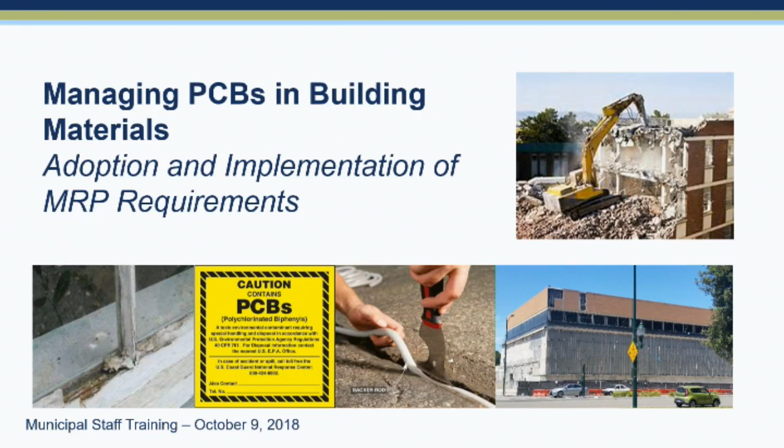All right, so well, let's see, I guess I'll go to the next slide. We've looked at that enough.

So we have a few goals for today. I don't usually do it this way - I printed out the notes for Peter, and I don't usually. Some of you know me, I'm a college lecturer, and I walk all around the classroom usually and talk in your face and things like that.

But today I actually printed out the notes portion as well, and that's because part of the goal of developing this set of slides is also for you to be comfortable with this information if you need to bring it to city council, if you need to talk to building officials, planning officials, contractors, what have you. We also put some notes so that it's useful for many people.

So as we go along, I want to double check our notes as I'm talking to make sure we have the material there. If you have questions as we go through the material, because there's something you're not clear on, or maybe you're clear on for yourself but wouldn't be clear explaining it to another individual and want more clarification, ask those kinds of questions as we move along. I think we have a good amount of time for Q&A as we move through our morning.

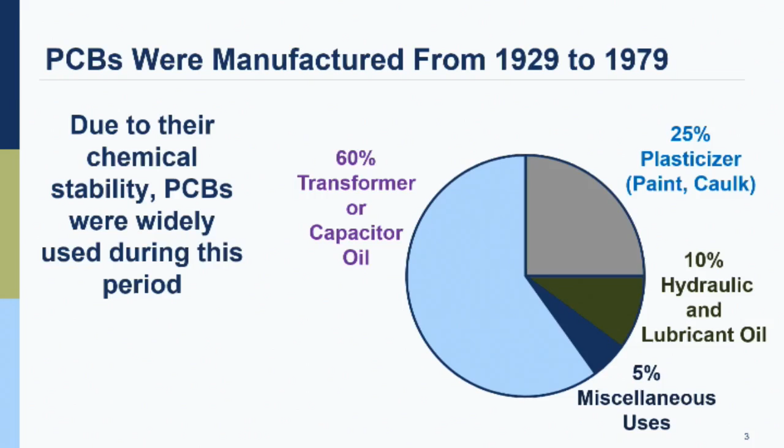PCBs are highly stable and have some unique properties, some unique electrical properties and other things, and so they were used for a number of different processes. This is where you mostly saw them over the years, and they were discontinued from manufacturing in 1979. The use could have continued into 1980 as stock was moved off of the shelf, so you see them in paints and caulking and things like that, which is much of what we'll be talking about here.

The issue here is that San Francisco Bay has been deemed impaired due to PCBs, deemed unfishable through the Clean Water Act. PCBs bind to soil and sediment, and at the lower levels of the food chain they pick up the PCBs in that sediment. It moves up the food chain and bioaccumulates, getting higher concentration through the food chain. We do have people subsistence fishing in San Francisco Bay, and we need to return to a situation where we feel the fish are safe for them to eat.

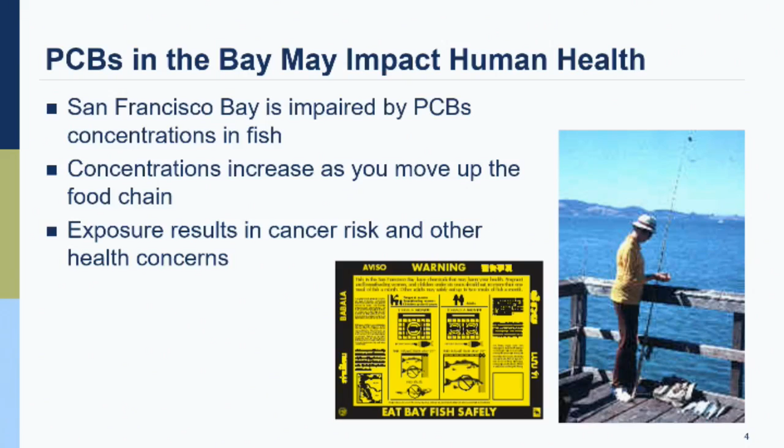The first health advisory came up in 1994, where it was determined that PCBs in some species of fish in San Francisco Bay were at high enough concentrations that they were not safe to eat. Under the Clean Water Act, if a water body is not fishable or swimmable, it's considered impaired, and in this case it's not fishable.

When a water body is impaired, the Clean Water Act requires that the Regional Water Board prepare a TMDL, total maximum daily load, which we put on this slide as a pollution diet for the lay people to understand what this wonky word TMDL means. The TMDL requires developing plans to reduce the loadings of that pollutant and eventually achieve water quality objectives.

The TMDL itself was completed in 2008. That means it was completed by the Water Board in 2008, and that's when implementation of the different aspects was able to begin, basically.

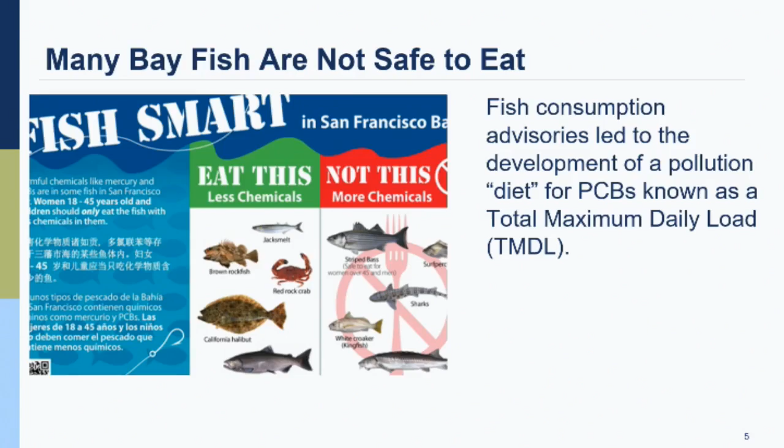This is when they identified, in their TMDL, all the potential different sources. Looking at this in the mid-2000s, these are all legacy sources at this point, because we're not utilizing PCBs anymore since 1980. So they looked at all these various legacy sources, and you can see there's quite a diversity.

San Francisco Bay is certainly unique compared to other water bodies in the United States that may be impaired with PCBs. We're a different kind of watershed in that it's a bay and an estuary rather than a river, with PCBs moving out less readily. We also have dredging for the shipping channels, so it's a very unique situation here.

So they looked at all these different sources, including what's coming in from the Central Valley, from those watersheds, atmospheric, any hot spots, municipal or industrial, military hot spots, and the dredging as well. But even with all those other outside sources, it was identified that stormwater was the single largest source. So the TMDL is asking for stormwater to pull down the loading to San Francisco Bay, reducing that diet, if you will, by 90%.

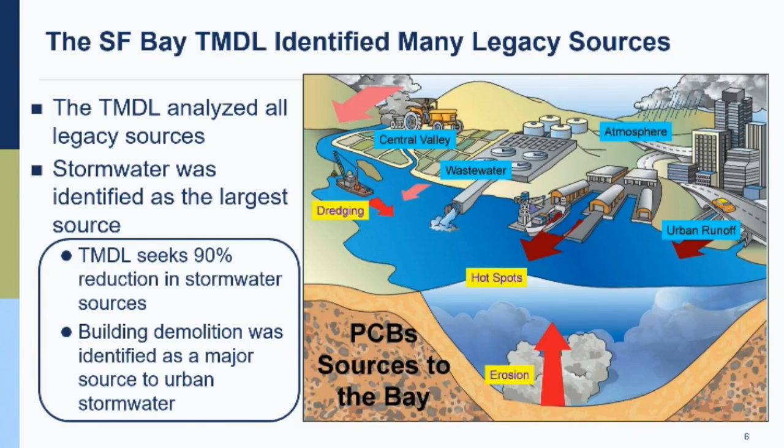Nonetheless, it's not that stormwater is being picked on, or that building demolition is being picked on. The TMDL looked at all these different legacy sources and sought to find reductions and opportunities for all of the different sources. So while we are going to talk about this one for the rest of today...

This very last bullet item is about managing PCBs in building materials. Realize that, and this might be helpful when you're talking with building owners, consultants, contractors, for them to understand that the regional board didn't just seek out buildings and the PCBs in buildings, that it's part of this larger body of effort going on throughout the Bay Area. We've got the hot spots, the dredgers doing their part, monitoring sediments, wastewater treatment operators and municipalities looking for hot spots and working on green infrastructure that would collect stormwater rather than let it release pollutants right out into the water bodies. So it's part of a bigger picture, and hopefully that will assist in getting that information out to the building contractors.

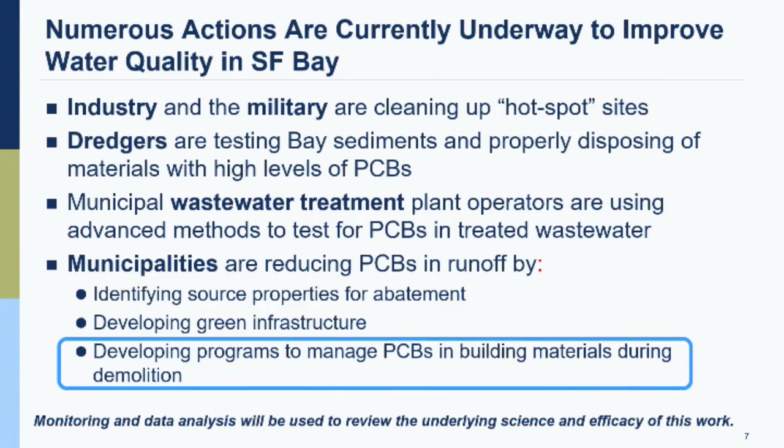That does lead us to why we are here today: the provision in the MRP, your municipal regional permit. There's 76 cities and counties and other entities that need to be implementing this. So the effort we're sharing with you today is how to standardize this for all of you, so there weren't 76 different ways to implement this throughout the Bay Area.

This is part of provision C12, how to deal with building materials prior to demolition rather than during demolition. The requirement in your shared permit is to come up with a method for identifying the right kinds of buildings and building materials, and then provide the necessary authority for that. We'll walk you through that.

It's only applicable to buildings from January 1st, 1950 to the end of 1980. That gives a little wiggle room, even though it was discontinued in manufacturing in 1979, they were still moving it off the shelves, so that gives us a little bit of space. Wood frame buildings and single-family residences are not part of this, and it's also applicable only to complete demolition, and we'll get back to that in a few moments.

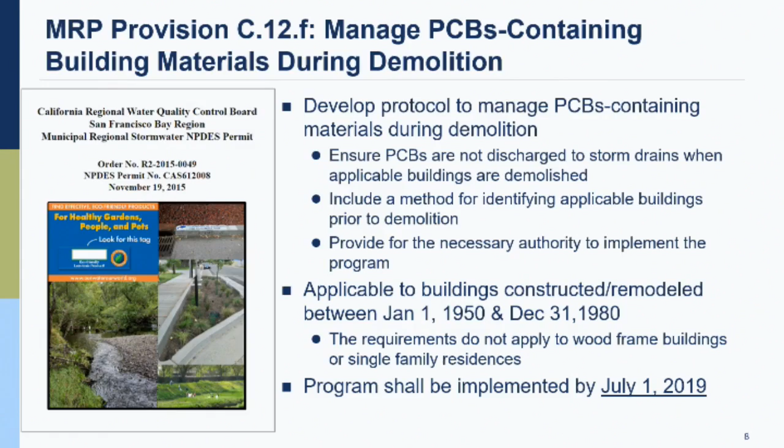The entire point of what we're trying to accomplish is when a building is going to be demolished, there is some time to evaluate the building, bring professionals in who understand what they're looking for, what kind of materials these PCBs might be in. We've identified the high priority materials, we'll talk about that in a minute. Then monitoring for that, making sure those high priority materials are managed appropriately prior to demolition, so that when the wrecking ball arrives, the particles most likely to have the highest concentrations of PCBs aren't escaping out to nearby storm drains, and the dust isn't spreading around. The dust that will be spreading around doesn't include the high concentration of PCBs, since we're removing them in advance.

This is very analogous to what is already done with asbestos, a similar kind of concept. Carmen, did you want to weigh in at all? I'll hand you a microphone—you have to have a microphone.

Hi, I'm Carmen Santos with the Environmental Protection Agency, and we deal with a lot of these issues about building demolition. One of the things that happens when somebody wants to demolish a building is to look into what materials have PCBs. They will know the age of the building, so they will check and evaluate that, take samples, analyze. For us at EPA, we prefer that anything that has PCBs be addressed, not only those 4 priorities identified through this BASMAA process, although those are very important and we find them most of the time in these buildings that are demolished. But the point I want to make is that you would still have PCBs in these buildings even after you take out these priority PCB-containing materials.

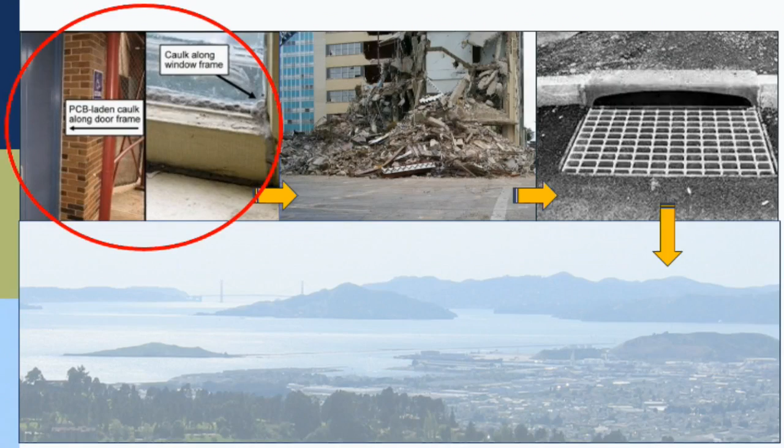So the MRP requires the following components: established municipal authority through an ordinance or resolution, a CEQA notice of exemption, an application packet for permittees wanting to complete a demolition, a methodology for how they survey the building, potential cost recovery, training processes, and submittal of information to BASMAA or your countywide program.

What we hope to show you today, if you haven't already seen it in previous meetings with some of you, is that BASMAA has developed some model documents. They've taken care of the CEQA analysis for you, prepared application packages and all these different pieces, so it should be fairly straightforward for each of the municipalities and agencies involved.

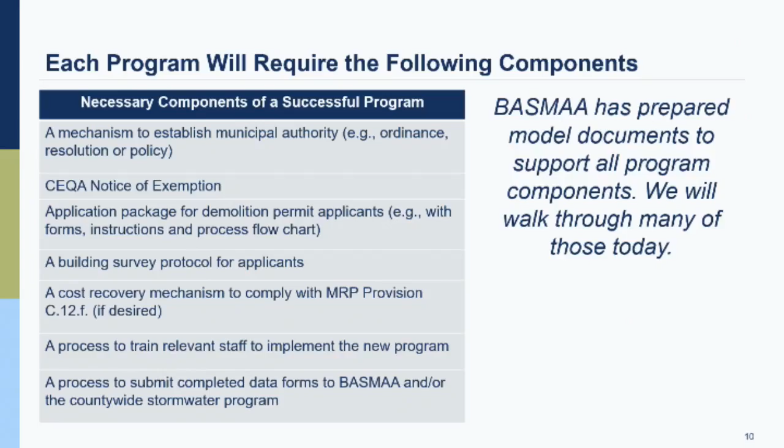As Carmen mentioned, the team came up with 4 high priority PCB-containing building materials, so we'll talk about that. We developed a protocol for you, for the contractors, and for the regulatory process. It's worth noting that we worked with a technical advisory group, and you can see the representatives that were there.

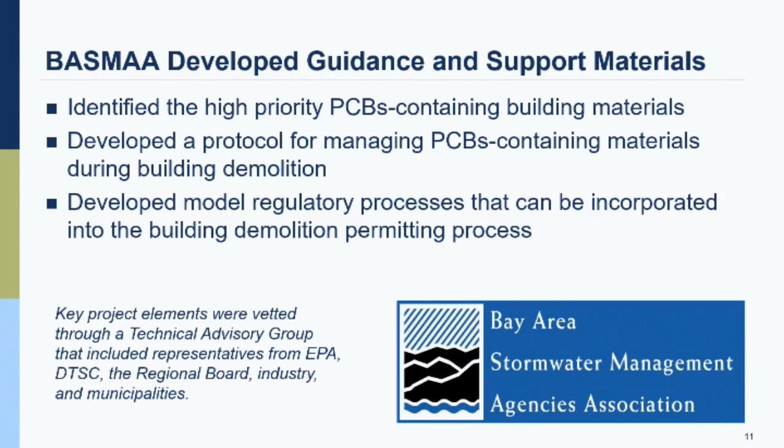So it has been vetted by regulators, industry stakeholders, and municipalities.

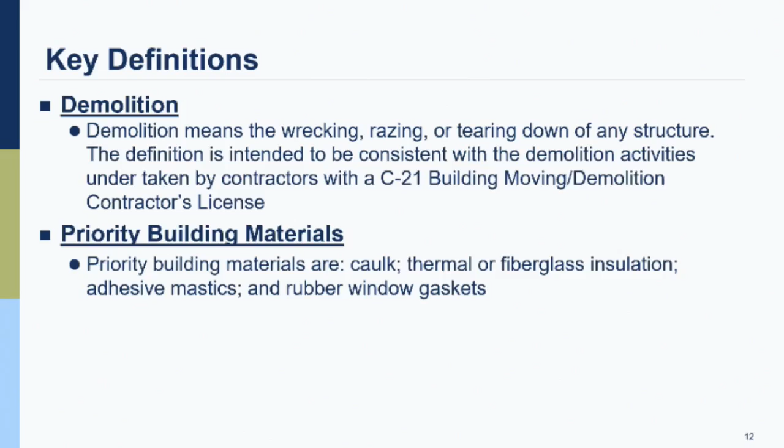So there's 3 key definitions, I'll put them all up there. We had a little haggling back and forth early in this process about what demolition means, and contractors explained to us that there's already a definition in their field. It's basically the complete demolition of a building, not a partial demolition of a structure.

I'll show you the 4 building materials in more detail in a moment, but we'll hear them over and over again. So really what we're talking about isn't all possible pieces of concrete, as Carmen alluded to, but caulking, insulation, gaskets, and other adhesives.

As I said before, it's any structure built or remodeled between 1950... so built or remodeled. If it was built in the 30s but had a significant remodel perhaps in the 70s, then you're going to need to take a look at it, or the contractor will, with those exemptions we mentioned before.

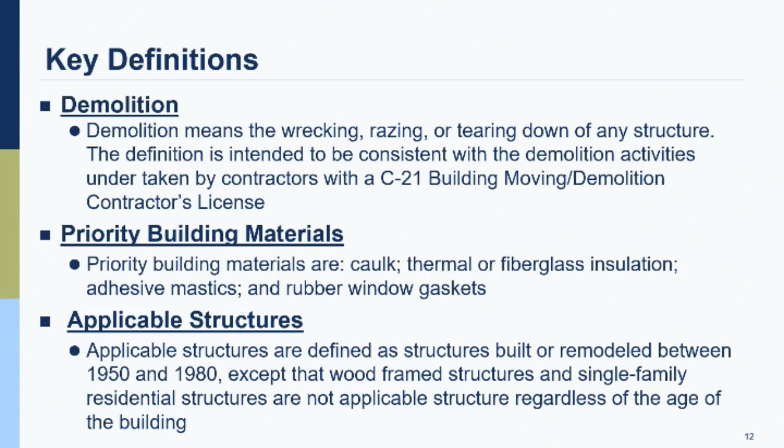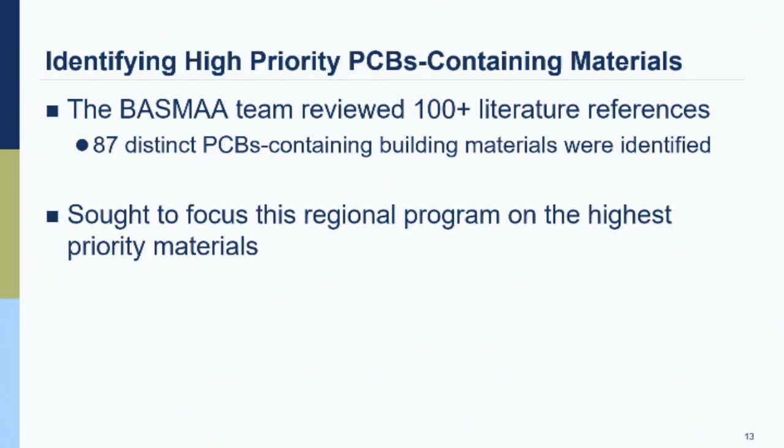Just briefly on background, how did we get to the 4 high priority materials you're going to be seeing? It was based on a very significant literature review, where they looked at PCB concentrations in a number of building materials, and focused on materials most likely to get into stormwater during a demolition sequence. There were some weighting factors and a whole analysis. If there's questions on that, we're happy to answer those during Q&A.

So it came down to caulks and sealants around windows or window frames, around door frames, expansion joints between concrete sections, say floor segments with an expansion joint in between them, and thermal fiberglass insulation around HVAC systems, heaters, boilers, heat transfer piping, inside walls or crawl spaces.

Adhesive and mastic, it could be below the carpet and floor tiles, or between the roofing materials and the flashing. And the rubber window seals or gaskets around any windows or window frames.

You'll notice a disclaimer here that this does not include things typically already managed with pre-demolition activities under current management strategies. So fluorescent light ballasts and polyurethane foam furniture and things like that would already have been removed per current regulations prior to demolition.

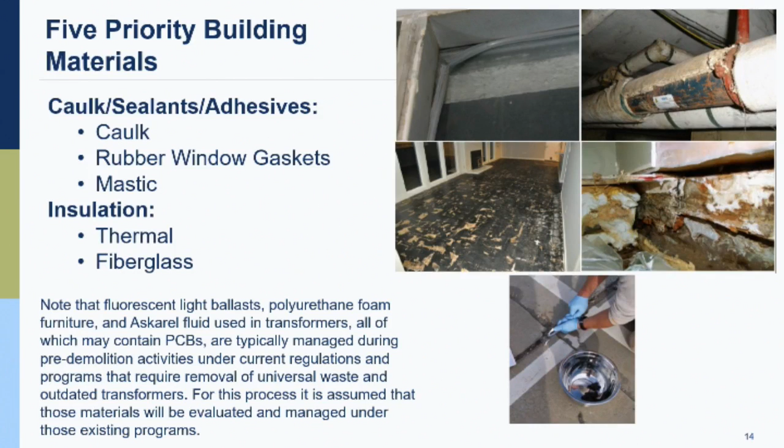All right, Peter, I think it's your turn.

Okay, thanks Stephanie. I'm going to handle the next section of the presentation on legal authority, and we'll get into the applicant package after the break. We thought it's important to start off this morning talking about what you all are going to need to do, because the deadline is approaching soon, and we want to make sure you're starting to think about, hopefully you've already started in your jurisdiction, talking with some of the other people that are going to be involved.

So there's this concept of establishing legal authority, and there are different options we've laid out in a memo, one of the BASMAA documents that's been mentioned. Before we go any further, I wanted to hear who's here in the room today, what different types of departments from municipal organizations. So how many people here are from a building department? Raise your hand. Okay, maybe about 10 or 15 people. What about a planning department?

Okay, just one person. All right, good. Maybe some more planners will be involved later. I'll talk about that. What about building inspectors specifically?

Building inspectors, okay, we got a couple of those. What about people in public works like engineers? Okay, we've got a few, 5 or 6 of those. What about stormwater program managers? Okay, we've got a good number of those, 10 or 15.

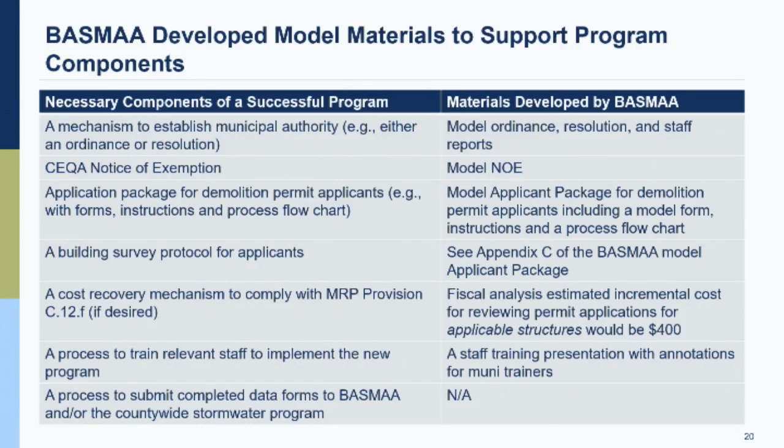Okay, so here's kind of an overview of the implementation process. You're going to establish your building authority, your legal authority, and your legal mechanisms, notify the applicants, maybe make changes to the documents that you already have or create some new documents, and make sure that you understand the process.

There's kind of these two thresholds, but it also gets a lot more complicated if EPA starts to get involved, and we're not going to try to turn all of you into EPA experts because it's a very complicated process, and your part of it is really maybe a very small portion, but it's a key portion, is to get these particular types of buildings that meet these different thresholds to start to test if needed. So that's really one of the main parts that the municipal staff need to do, is just to include that additional part of it.

And so there's these applicable structures and non-applicable structures. The applicant needs to do some screening. There's this level of 50 parts per million, but there are other thresholds as well. And so then the applicant will go through that process, and they'll submit a self-certified form to the municipality, either stating that no further requirements are needed, or that they will be doing testing and submitting the test results, and that they'll do the applicable remediation for that.

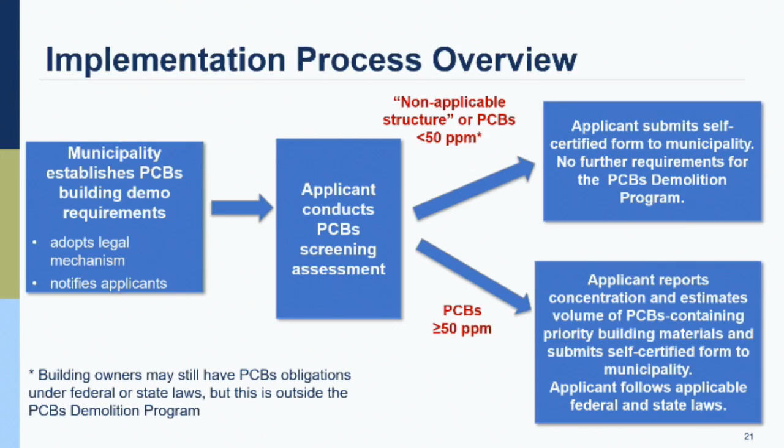So the applicant's role in the process is to do their due diligence, complete and submit the assessment forms, either being screened in or screened out, with the types of questions that we're going to be talking about, and then the testing if needed, and then demolition, and they'll be doing their remediation just as they would do for asbestos and lead, and if they have to do that remediation, they will do that. And the ones that are screened out will not have to do those additional steps.

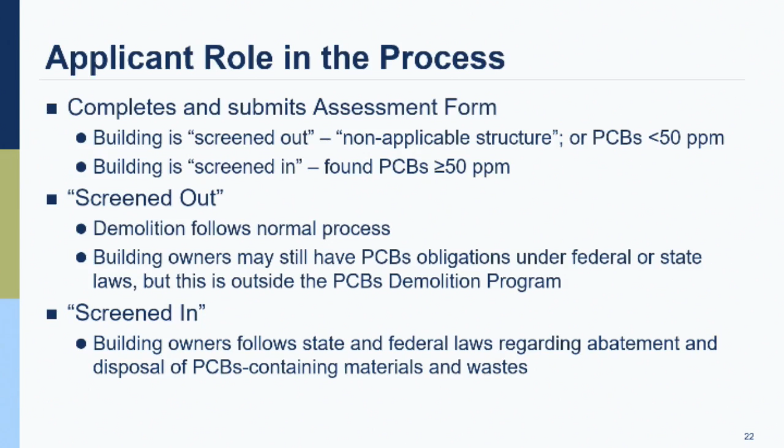Okay, so we're going to move on. Actually this next slide talks a little bit, hopefully you can see this, maybe the print's kind of small, but do we have it? Yeah, so there's this first step here.

This laser pointer's not very good, but the first step is: is the building wood framed or single family residential? If that's yes, then you're exempt from the process. If it's no, then you're going to ask more questions. Was it constructed during those years, 1950 to 1980, or remodeled? If it's yes, then you keep going down through the 3 different questions.

And if you answer yes to all those, then you're going to have to do more detailed analysis of the building. But if you can get out of those questions either by saying yes, it is a wood framed or single family structure, then you get exempt. Or if it's no to the other 2 questions, then you also can be exempt. So we're going to go into more detailed description of this in the next section. I just want to mention that this is in the applicant package to help the potential applicants understand what all the off-ramps are. So they'll see this flow chart in the package.

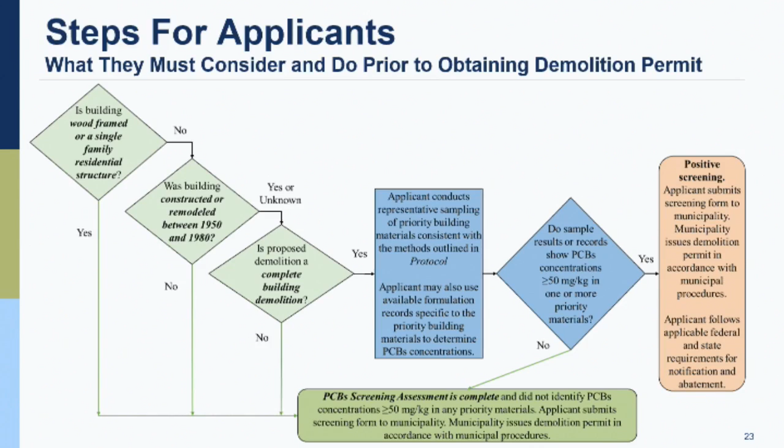Okay, and then just finally, I think this is the last slide of this section. We just wanted to show you these 2 different documents that were created by BASMAA through the regional project. One is the model screening applicant package that we're going to talk about next, and one is the protocol for evaluating the priority PCBs-containing materials before building demolition.

And when we say before demolition, it could happen as part of the demolition process, so it's kind of maybe a wordsmithing there, but in my mind, doing the remediation is part of the demolition. You're going to be removing parts of the building. So in other people's minds, that's something you do first before you demolish the whole building, is you take out the various sections. So there are different ways of understanding that wording. But anyway, you have to make sure that before the building is sent off to the various recyclers or landfills that you've done the due diligence and done the process correctly.

So those are both documents that were created by BASMAA and are available for people to use.

Okay, so now we have some time for Q&A before we go to a break. And just if there's any other questions, maybe we've already answered the questions that people had, but if there's a few more, we can, over here. And also if people have begun to have a conversation within their municipalities, if you have thoughts or feedback you want to share with other agencies.

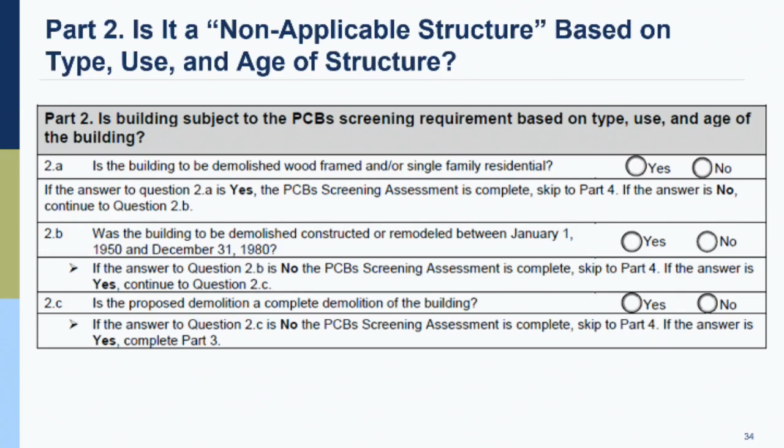Now, if they don't screen out, but rather screen in, then you have part 3. Let's look at what part 3 says. There's 2 options under part 3. Most likely they're going to use option 1, where they're conducting representative sampling. They're on the left. And there's a series of tables, which I do have in a future slide. There's a set of tables that goes with this. There's a table for each of those 5 priority pollutants, or priority materials, sorry.

So they'll have to fill that out. You'll see that there's a QA/QC checklist. So that's likely what they're going to do. It's possible, we've provided an option 2 on the right. It is possible that there would be existing sampling records for that facility, and if so, they could provide that as well, or in lieu of having to do sampling.

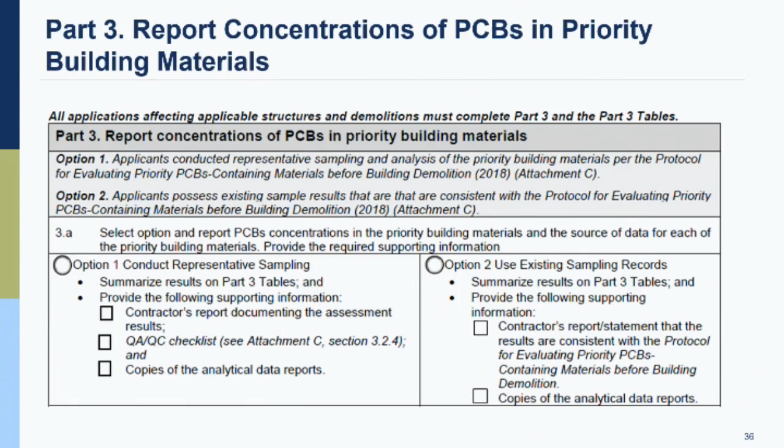What is the protocol for the sampling? That is that second document. So that explains those 5 priority materials that we discussed before. It describes the sampling procedures, what kind of equipment, the frequency. It explains the frequency of sampling and QA/QC, and then there's some photos that help them identify the materials.

I pulled my laptop up over here to the front table because we also prepared a second presentation, very similar to this one, but one that's tailored more to industry representatives. And on that, we had an additional slide that's not in this that maybe we would like to add to this in the future, because this is to that question that came up earlier as far as minimum sample frequency.

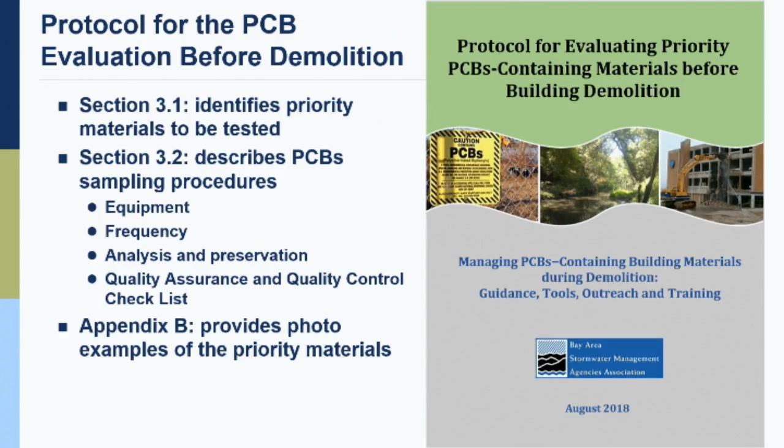And there's a table in this protocol that describes the minimum number of samples, like for the caulking or the rubber window gaskets. It's so many samples per linear foot. So like 3 samples per 50 to 250 feet of caulking, for example. Or if it's mastic that maybe is under some floor tiles, for instance, it's a minimum of 3 samples per 1,000 square foot of the mastic area. So, and then for thermal or fiberglass insulation, it's 1 bulk sample from each homogeneous area. So that is included in this protocol, and we can include a sample slide for this for your future trainings.

And then the last part, which everybody needs to fill in, is that part 4, the certification. And there might be an owner for the property, or it could be a trust with a legal representative. They may have a consultant or a contractor. If so, the form is asking both of those to sign. So the owner or their legal representative for the trust, as well as the consultant. So not just the consultant, but some ownership as well.

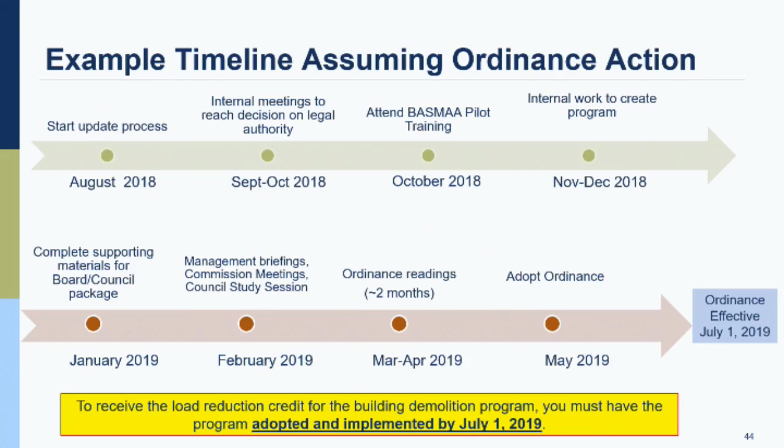Right, and of course, just warning again, you got to have this in place. Make sure everybody knows that. July 1st, there's really nothing in the permit that allows anybody to do it later. It's got to be done by that time. So you would be getting possibly a notice of violation if you don't have it ready to go on July 1st.

And if you have a web page, does anybody here not have a demolition permit process? I think we've heard that most jurisdictions, if not all, have some kind of permit for demolition of a building. Some might incorporate it into their building permit, but I think everybody has a separate demolition permit. Okay, so nobody here doesn't have that. Everybody requires a demolition permit. So that's obviously one of the key mechanisms, your demolition permit.

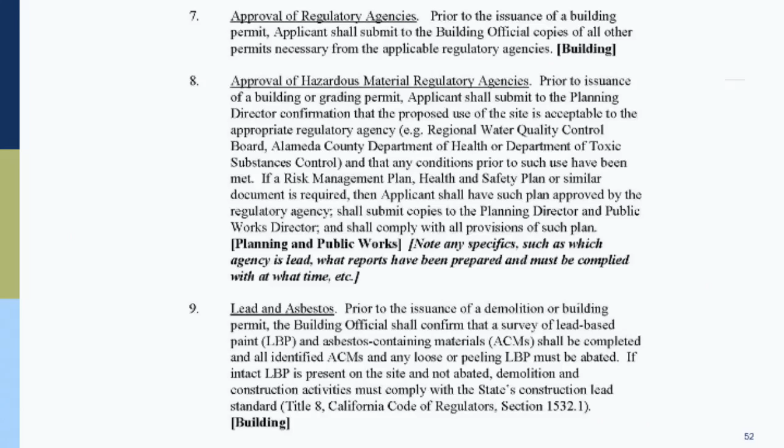Okay, so that's the end of our presentation, and we have now about 15 minutes or more if needed for more general Q&A about the whole program. We can try to talk a little more about some of the areas we've already discussed, maybe in a little more detail. I wanted to make a statement, and I think John clarified it—tell me if I'm wrong.

I think basically what Sherry was getting at is that there are all these existing regulations, and there are many buildings going through the proper remediation processes now to deal with PCBs. We often see it for government-owned buildings, or large ones like Candlestick Park, or Kaiser Hospital. So some people are already doing this, but not everybody is. And I think that was part of the goal here—to try to get everybody to test, not just the more responsible parties who, like Kaiser being a health-related organization, don't want anything to come out in the press saying they didn't do the right thing, even when it wasn't technically required, because they want to do the right thing. That's kind of what some of these regulations are geared at—making a more level playing field and making everybody do their due diligence and really follow the intent of the regulations.

Even if it wasn't enforced 100% of the time, now we're going to require them to test if they go through these screening processes, if they go through the screened-in process. Does that sound right? Okay, thank you.